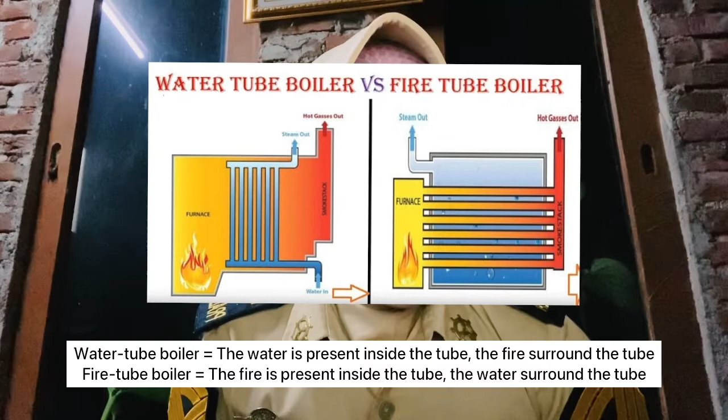Boiler has various types, but the most common is divided into two: water tube boiler and fire tube boiler. Water tube boiler is a type where water is present inside the tube and fire surrounds the tube. Fire tube boiler is a type where fire is present inside the tube and water surrounds the tube. These two have many differences, but generally fire tube boiler is used as auxiliary machinery on board, because it is not suitable for larger power plants. Water tube boiler can be used as the main boiler because it has a higher rate of steam production, and the pressure is limited up to 100 bar.

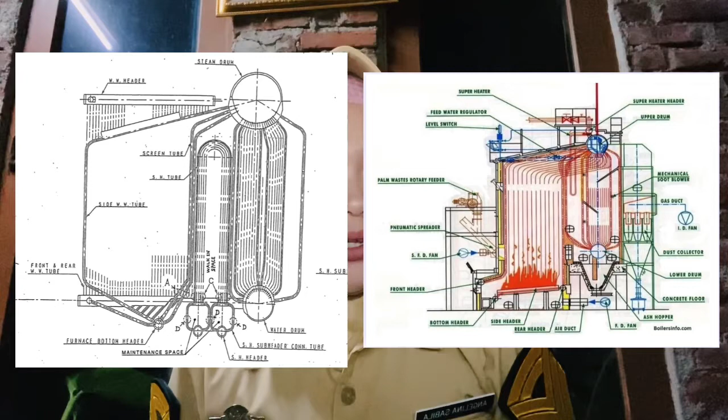In this occasion, I will only focus on water tube boiler. Here is the figure of water tube boiler. As you can see, there are many parts, but I will only explain the major ones: economizer, boiler fan, air heater, furnace, water wall, burner, steam drum, water drum, superheater, and desuperheater.

Each of them has its own function. First, economizer, as a heat exchanger, is a boiler accessory used to recover excess steam or exhaust gas to heat the feed water before it enters the boiler drum for energy efficiency. Second is boiler fan, used to supply air from the atmosphere to support combustion. Next is air heater, used to heat the supplied air from the atmosphere before it enters the furnace to support combustion. Next is furnace or combustion chamber, the place where combustion occurs to heat up the water tube.

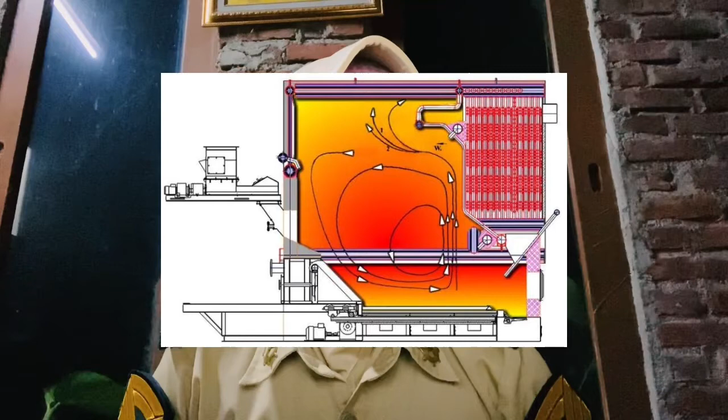Next is water wall. Water wall surrounds the furnace to absorb the heat so it will not escape outside. Next is burner, used to provide heat by the combustion of fuel oil, including natural gas, mixing with air or oxygen.

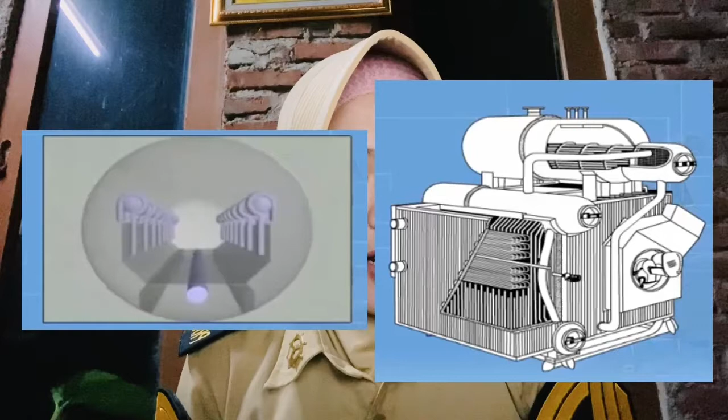Next is steam drum and water drum. Steam drum, located at the top of the boiler, is a vessel where steam is collected inside it. The water drum, at the bottom of the boiler, is a vessel where feed water is collected inside it. Both are connected to each other by the water tube, which will be heated up inside the furnace.

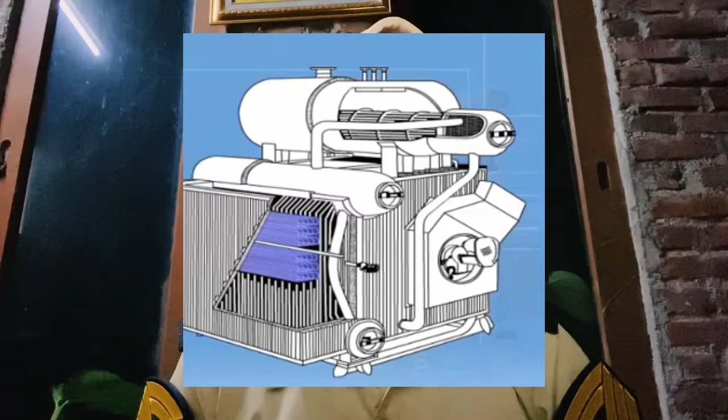Last is the superheater and external desuperheater. The superheater is used to heat the steam flowing from the steam drum to evaporate the remaining water moisture, turning it into really dry steam, or high pressure steam with higher temperature. The superheater will deliver it to the main turbine and turbine generator, and the external desuperheater will deliver it to other machinery systems and accessories.

Now I will explain the working principle of the boiler, or the process of steam generation. First, the feed water that has been deaerated will pass through the economizer to get preheating, or first stage heating, for energy efficiency. After that, it flows to the steam drum to fill the water tube and the water drum. Then the burner, located at the top side of the furnace, conducts combustion by atomizing the fuel or spraying the gas, mixing with air. After that, the igniter beside the burner will spark to flash the fire so it can heat the water tube.

The water inside the tube gradually turns into steam, which is collected inside the steam drum, and it flows to the superheater. The superheater heats it again, or evaporates it again, until it becomes dried steam, or high pressure steam. But before the superheater delivers it to the main turbine or turbine generator, there is an STC valve, or steam temperature control valve.

There is a temperature sensor near the STC valve which measures the steam temperature. If the steam temperature hasn't reached the desired value, the STC valve will open and recirculate the steam to the water tube and the superheater, so the steam can be heated again until the temperature reaches the appropriate value. Then the STC valve closes and the steam can flow freely to the main turbine, turbo generator, and other machinery.